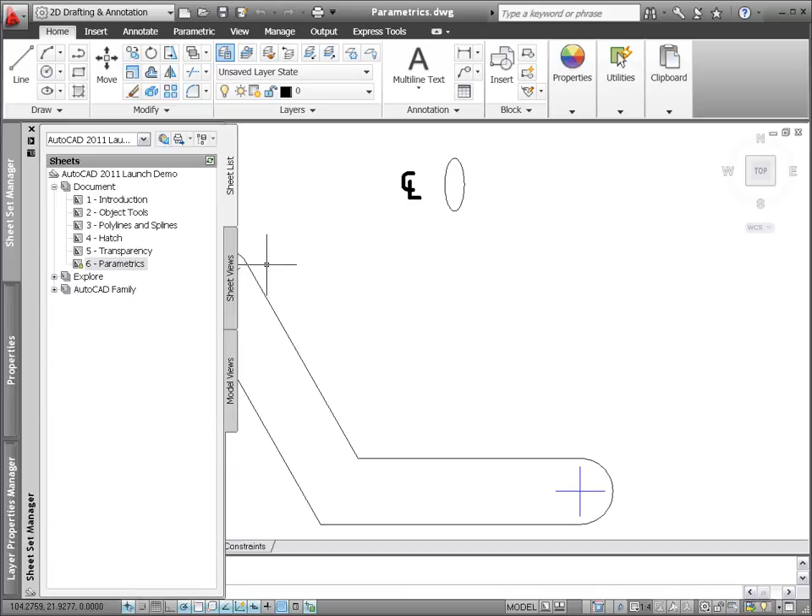2D parametric functionality has been enhanced in AutoCAD 2011, making geometric and dimensional constraints even easier to use. The Auto Constrain tool, which enables you to automatically apply geometric constraints, is updated to include the equal constraint.

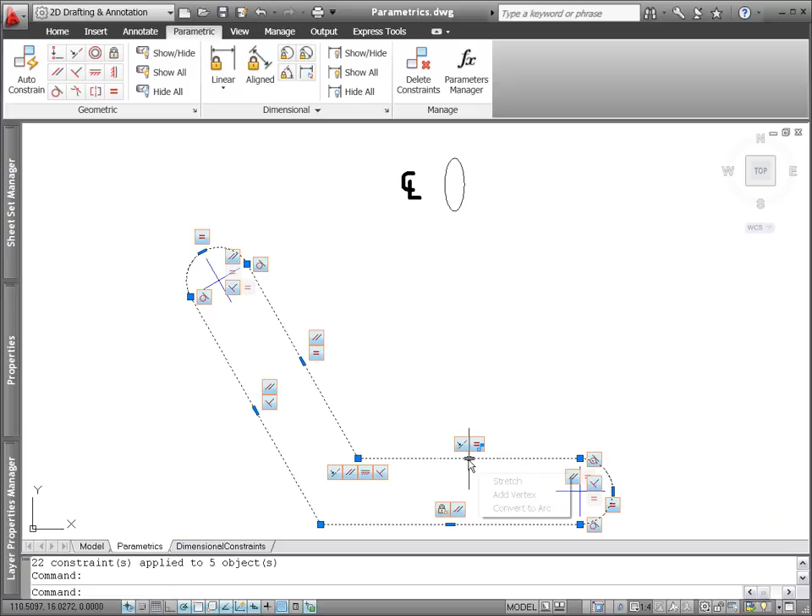A new Infer Constraints control on the status bar automatically infers and applies geometric constraints as you create and edit geometry. For example, if you draw a rectangle without inferred constraints, it's nothing more than a four-sided polyline. When you edit a vertex, it loses its shape.

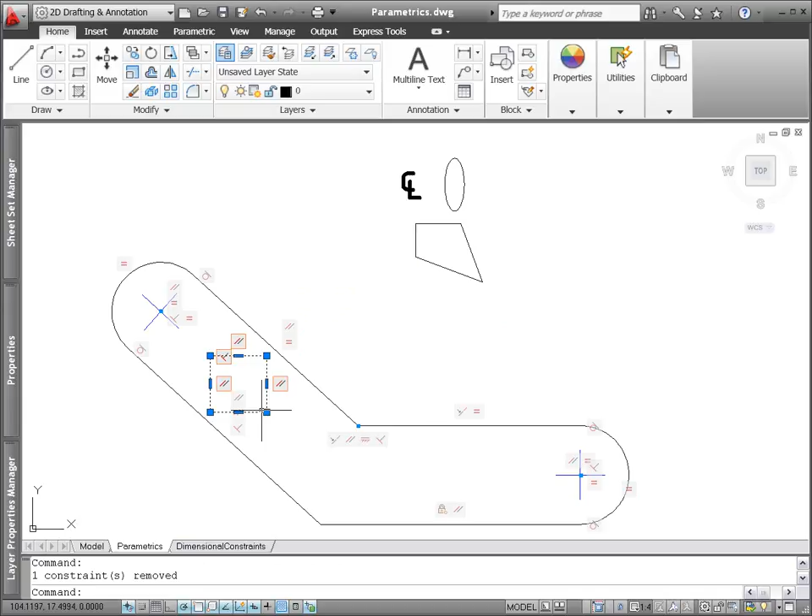If you draw a rectangle with inferred constraints, it automatically behaves as a rectangle should, maintaining parallelism and perpendicularity. You can individually remove any inferred constraints that you don't want, or apply additional constraints as needed.

When you draw with object snaps, such as creating a circle at the center of an arc, inferred constraints ensure those points maintain their relationship. If the circle moves, so does the arc. Enjoy the same automated behavior when editing geometry with object snaps.

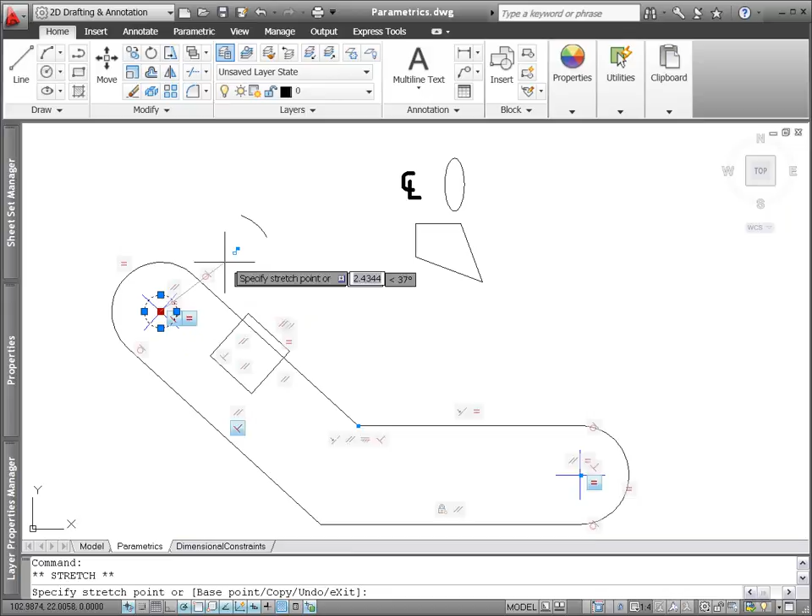For example, copying the circle to the center object snap of an arc infers a coincident constraint just like drawing the circle did. In addition to creating point-to-point coincident constraints with specific object snap points, you can use the nearest object snap to apply a coincident constraint between a point and an object.

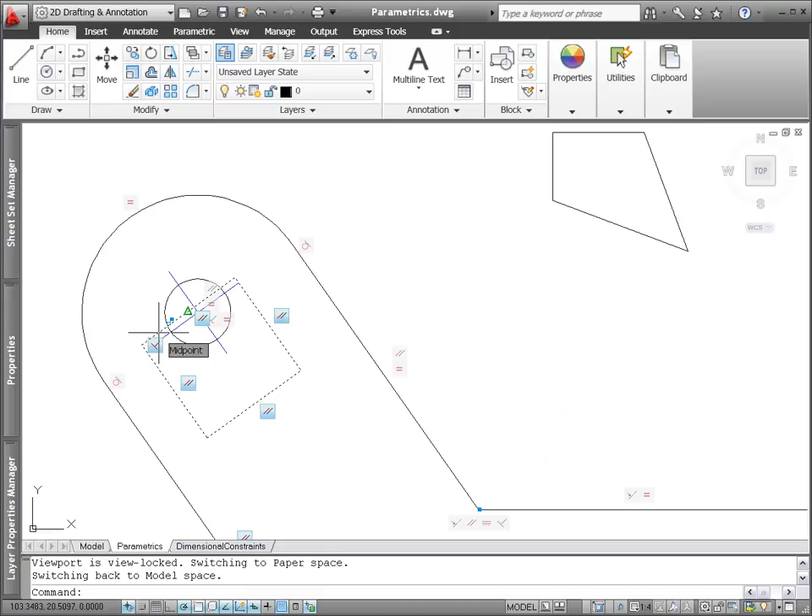For example, if you move the midpoint of the rectangle to the nearest object snap of the center line, the rectangle has the flexibility of moving anywhere along the center line, including its virtual extension. Inferred constraints also apply to fillets and chamfers. Creating a fillet, for example, automatically applies tangent constraints between the arc and line segments.

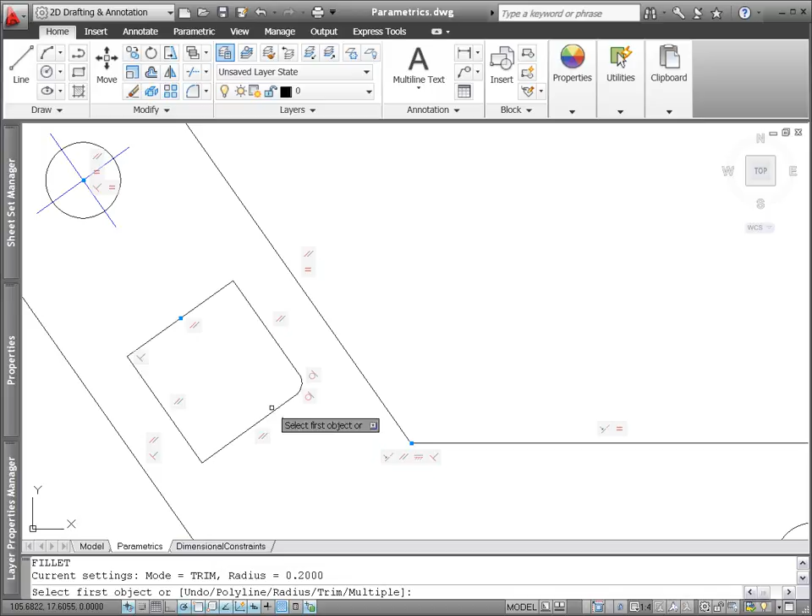AutoCAD 2011 provides improved parametric support for ellipse and text objects. You can now apply parallel, perpendicular, collinear, horizontal, or vertical constraints between the major or minor axis of an ellipse and other objects. Similarly, you can apply these geometric constraints to text objects.

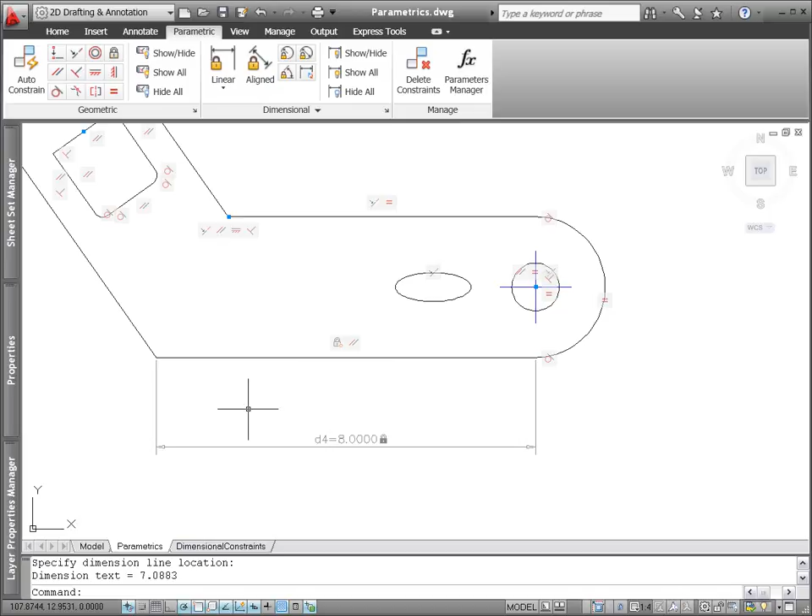In addition to the enhanced geometric constraint functionality, AutoCAD 2011 offers enhancements to dimensional constraints. When entering dimensional constraint values in place, you can click on an existing dimensional constraint to insert the constraint name. If a dynamic dimensional constraint references another parameter, an fx is included in the parameter name to alert you that it's dependent on other values.

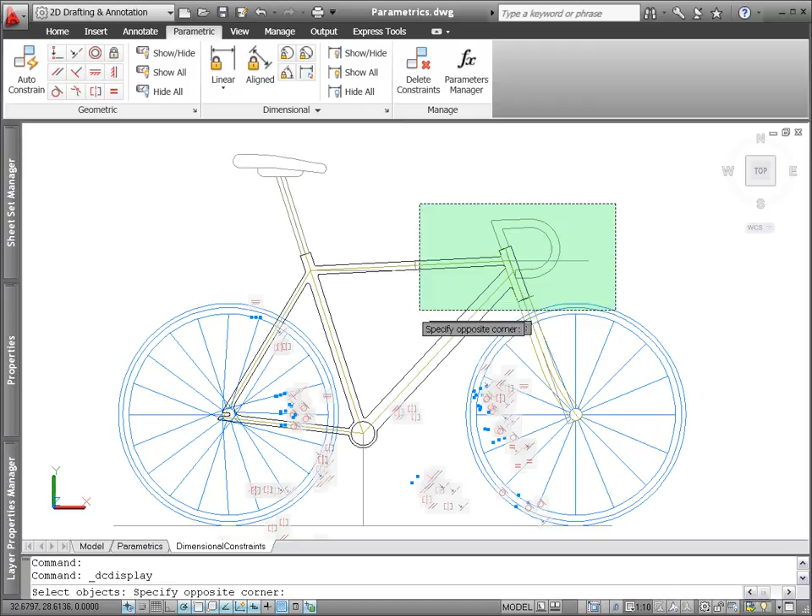New tools on the dimensional panel provide you with more control over the display of dimensional constraints. Using the Show/Hide tool, you can select the specific dimensional constraints you want to show or hide.

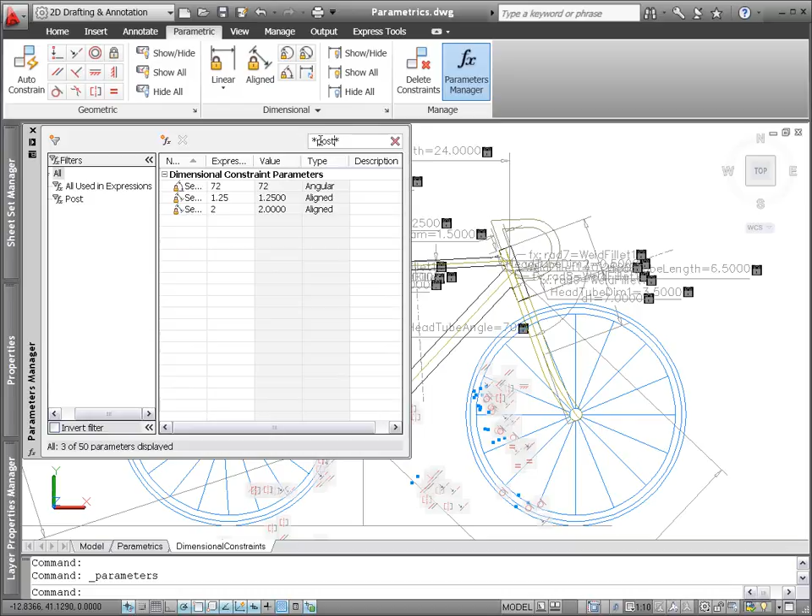For those drawings with many dimensional constraints, you can organize them into filter groups using the Parameters Manager. Create new filter groups and then drag and drop parameters from the list into an appropriate group. A new search tool enables you to easily find parameters with a specific name.